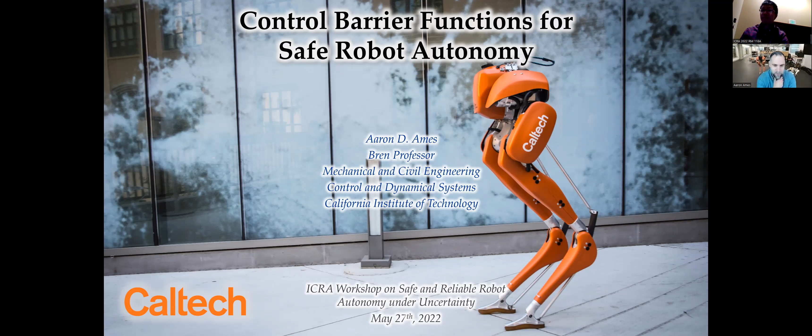I'm going to talk about safe autonomy. Before starting, I want to just note that my students played a huge role in all this work. This is my current lab, and there were 9 of them at ICRA. So hopefully you ran into some of them over the course of the conference.

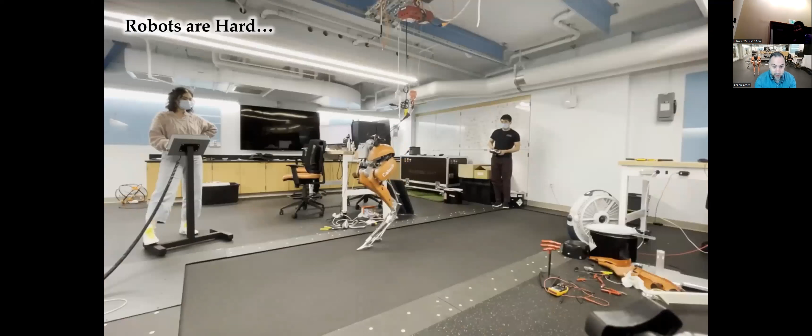All right, so to kick things off, as everyone in the audience knows, robots are really hard. They fail often and spectacularly, which makes them a lot of fun to work with. But the question becomes, what do we do with this fact that they're hard? How do we ensure safety on robotic systems in this context? So what we'd like to have is this working example of robots all the time. Robots are really awesome when they finally work and things come together.

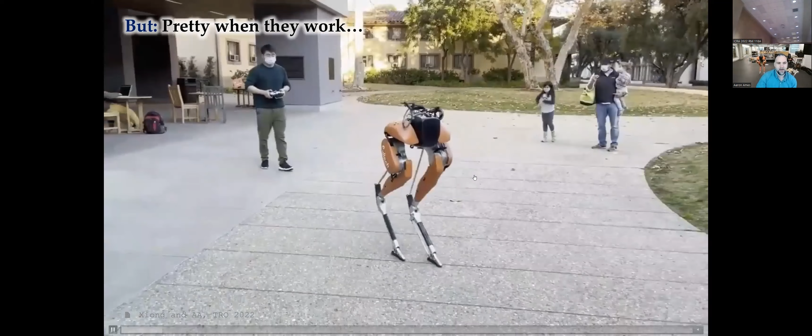This is just one of my students, Xiaobin, walking Cassie around the Caltech campus. And I like this video a lot for multiple reasons. One is you get to see Cassie walking. You've probably seen Cassie and Digit multiple times throughout. But the other reason I love this video is this, where the kid comes from the background and runs up on the robot and tries to catch the robot.

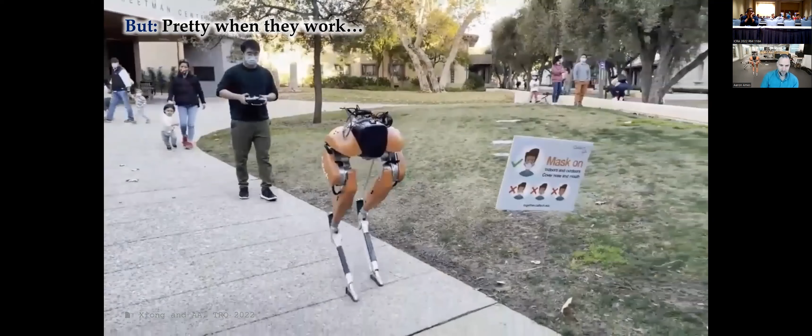And I think this is another aspect of what we do with robotic systems that both makes it exciting, because there's this broad appeal of robotic systems, but also makes safety really a critical component. People, humans like to interact with robots, and we need to make this safe.

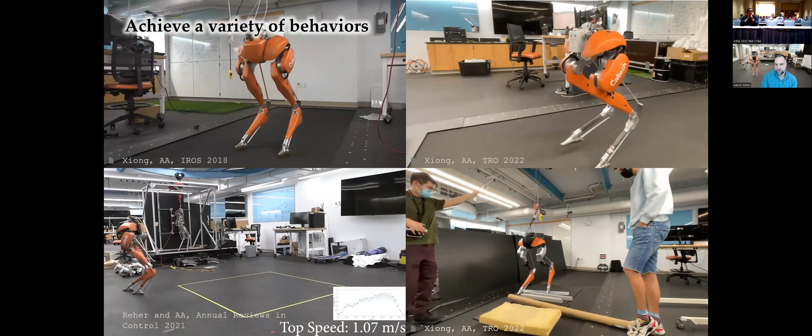I just want to also note some other highlights. This is just a highlight reel of different behaviors we've gotten in the lab. And it shows that robots are really capable at this point. What we've been able to do in the last 10 years, 15 years on advanced robotic systems is quite remarkable. To do these kind of things in a lab on a robot, walking over really complicated terrain, jumping, walking quickly. So robots have great capability, not just in the lab, but outside of the lab.

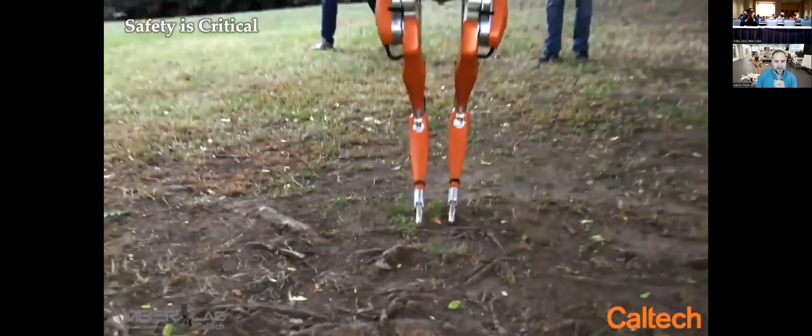So this is just a shot of, again, Cassie walking with our algorithms around Caltech campus on unknown terrain that has a non-trivial slope on it. And so this shows, again, the capability of robotic systems. And as with everything, though, you see these wonderful videos of robots working right. As you know, with your ICRA videos, you get these great shots that you put with the ICRA paper. But often the world's a bit more complex, and things don't always work exactly as you would expect.

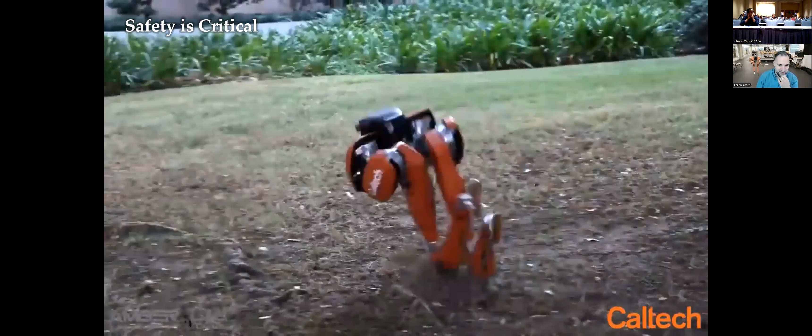So this is another video. This is actually a much earlier video, some older controllers on Cassie. And in this case, the robot spectacularly falls on this root system it wasn't expecting. So the question in terms of safe autonomy becomes, and this is really the thing, our focus changes from getting robots to do things to making sure they're safe while they're doing those things. And that's where the conversation really changes from stability to safety.

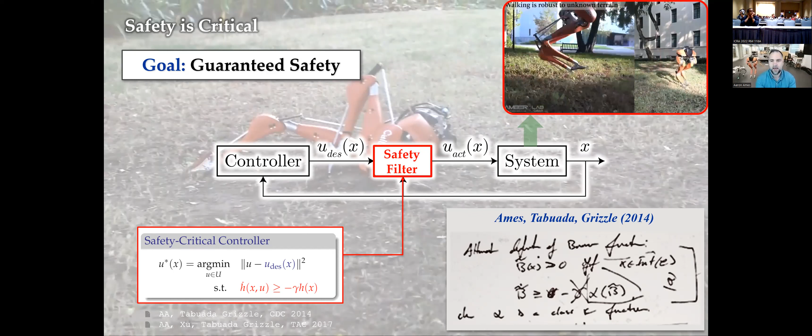And this is what I want to highlight in this talk: not the controller synthesis, specifically stability or any of those concepts, but rather how we view safety. And what we'd like to have is this video on the top right, where now it's walking over that same root system, but it does so without falling, in a safe manner.

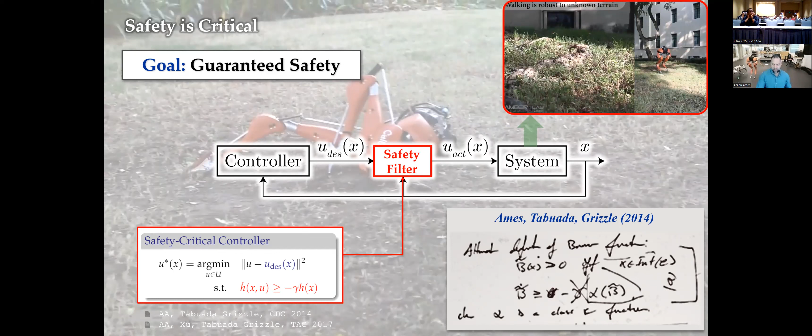And so to talk about safety, I'm going to talk specifically about this mathematical construction called control barrier functions. It's a relatively recent invention from about 2014 that has changed my viewpoint of safety in a formal context. So let me start with a little bit of the mathematical background. All right, so what do we mean by safety? I'm going to be really brief on the mathematical front, but what I mean by safety is the following.

And this question has really long origins. The earliest results date back to 1942, and arguably a little bit sooner than this, with Nagumo's theorem. Nagumo's theorem gave us necessary and sufficient conditions for a system to be safe. But these conditions almost always relied on checking conditions on the boundary. But what we're really interested in is, how do we quantify safety looking everywhere in the set? Because this changes the conversation.

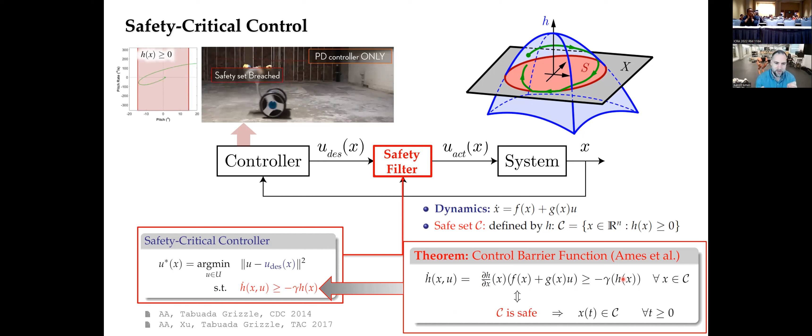And so the recent invention from 2014, again with me and Paulo Tabuada and Jessy Grizzle, was we can come up with conditions that are also necessary and sufficient, but now they extend to the entire set. That is, everywhere in the set, you can check the derivative of this h function along solutions. And if it's lower bounded by minus some class K function, view this as a constant if you want for simplicity, times h, then you're guaranteed to be forward invariant in that set. And what this does is allow us to synthesize controllers that guarantee safety, specifically optimization-based QP controllers.

So what do I mean by this? How does this work? Well, we take our nominal control value, u desired, that's what was running here. And so in this case, safety is the Segway staying upright. And what's happening is my student, Tom, is kicking the Segway, which pushes it outside of its safe operating region, causes it to fall down.

So if we instead take that controller that's running here and put it in as u desired, and then enforce a safety constraint on top of that via control barrier function, when we kick it, it no longer leaves a safe region, but rather stays within it for all time. And so this, again, gives us safety via this idea of a safety filter, which is this quadratic program.

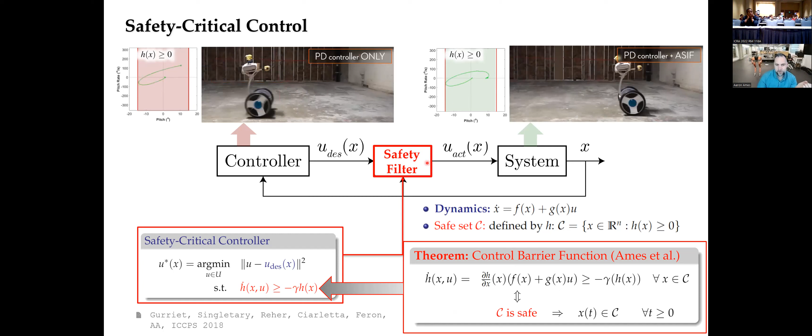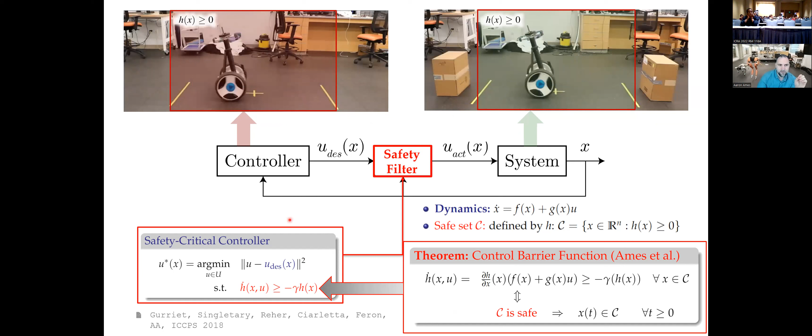We can do this with lots of different notions of safety. For example, if safety isn't the Segway staying upright, but the Segway staying in some region in space on the ground. So imagine people are working here. This is a factory environment. Then in this case, without the safety filter, you can make the robot go really unsafe. But with the safety filter, modulating it based on the control barrier function, you can keep the Segway within this safe operating region. So that's the basic mathematical control framework.

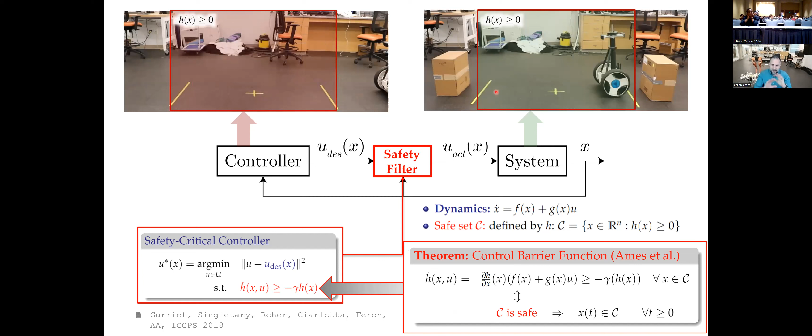And this has had a lot of applications, and I'm going to just describe some of them briefly. One example is drone flight. So now our safe set is defined as not hitting obstacles in space. So there's onboard camera, onboard sensing, onboard computation here. And when my student moves the obstacle, which is defining the safe region, now it's safe for the drone to move forward.

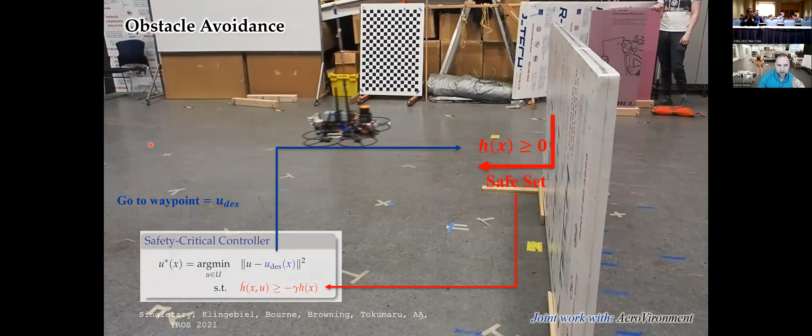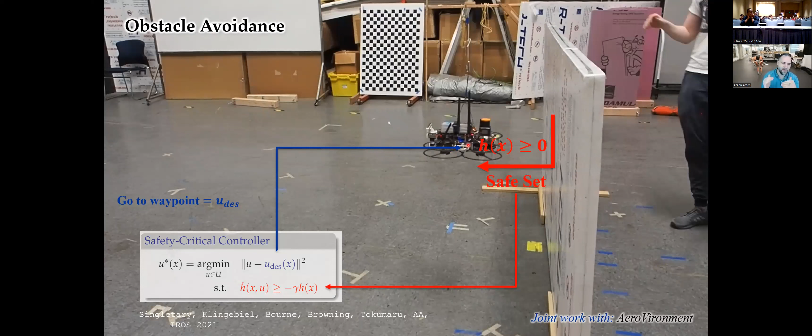So again, the drone is on a path that would drive it right through the obstacle, but the barrier function prevents that, overrides that command because it would result in unsafe behavior. And when that obstacle is removed, it can continue on with its nominal trajectory unabated.

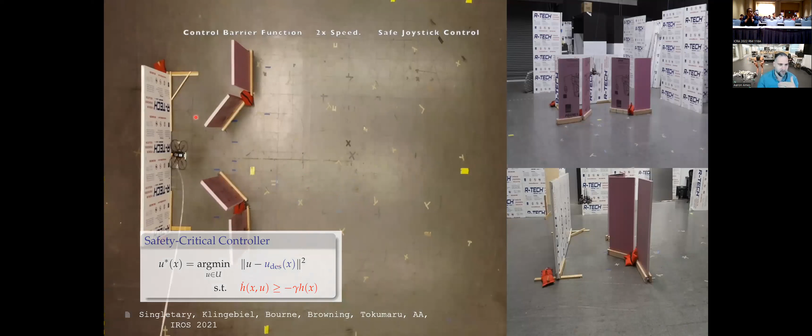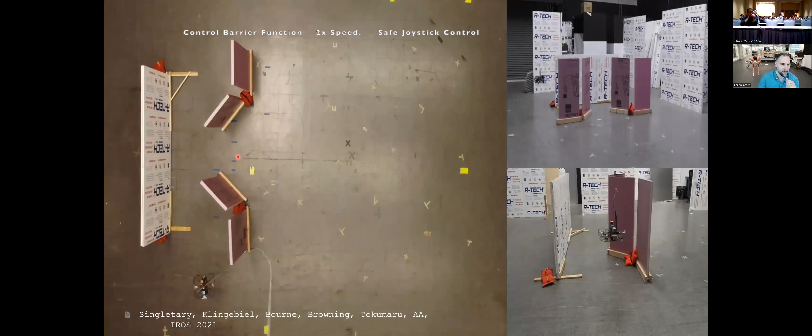So we've also done this with more complicated obstacles. The great thing is we don't need to have convex obstacles, convex space. You can just define this over really complicated geometries in really simple form through these functions. And again, here a pilot is trying to drive the drone against these walls, but the barrier function is preventing it from hitting the walls in this context.

One more example that I think is really compelling. This was actually presented at ICRA a couple of days ago, which is safe drone flight via geofencing.

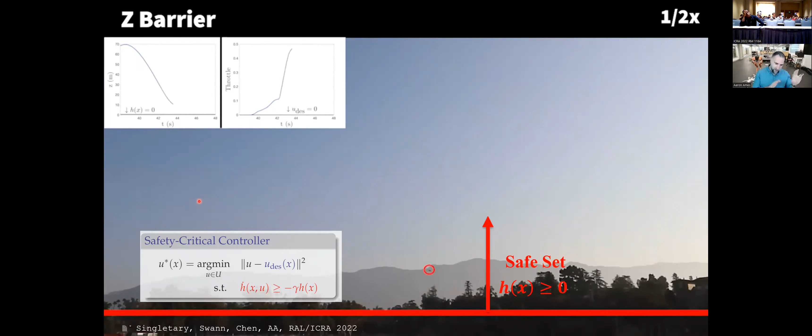So this is the same idea as before, but now we've come out of the lab and into a natural environment where now the safety constraint is don't leave regions in space defined by the geofence. And you'll see here, this is the red line showing where that geofence is. And the pilot in this case, just like before, is trying to drive the drone outside of the safe region.

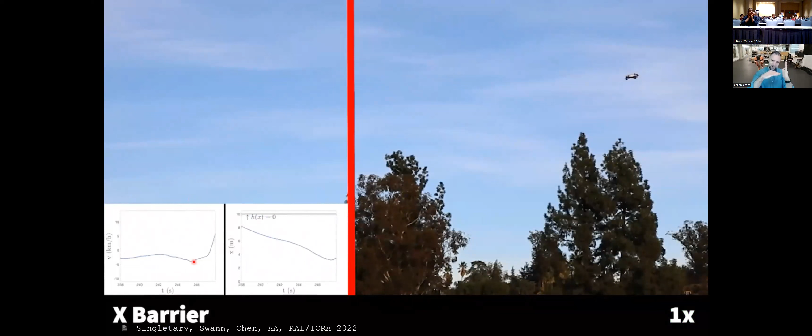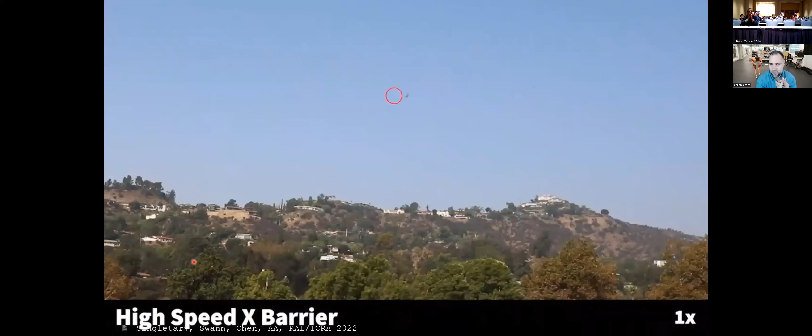And you'll see the value of the barrier function here. So it always remains positive. And the value of the velocity as it hits that wall, the drone slows down in the process. So again, we're able to do this with onboard computation, onboard sensing, in this case using GPS, and at really fast speeds.

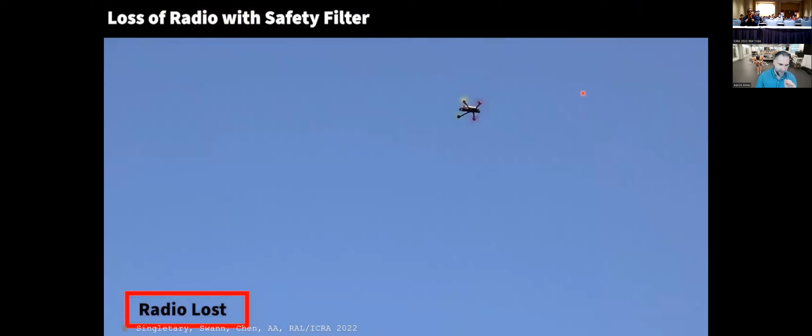It's hard to even show this now at full speed because the drone here is actually traveling at 100 kilometers per hour. So it's going really, really quickly. And we're able to still prevent it from leaving these geofence regions. So that's sort of the basic mathematical framework for safety that I want to underlie the talk on autonomy. So where does this fit in autonomy?

Well, let me set the stage a little bit with more complicated robots. So these safety filters are fantastic and work really well, if I can say that about my own work, on lots of different applications. And again, I'm going to show some more examples later. But things get really interesting when you get to more complex robotic systems. So you can still apply barrier functions in this case.

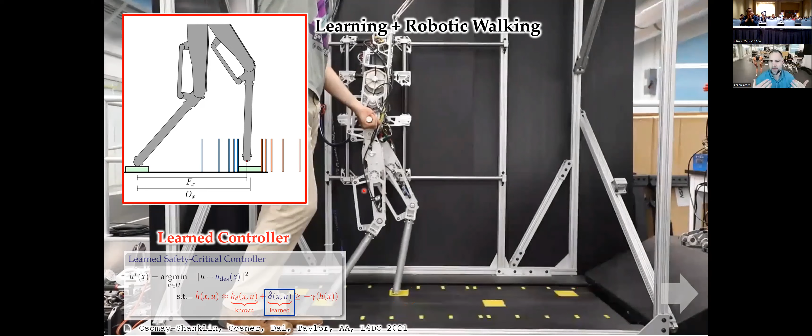So in this case, the application I'm going to show you is what's called stepping stones. So here, the barrier function is that the feet of the robot must land within these yellow pads at every point in time. But because this is a very complex robotic system, if you just enforce this as is, there's errors in the system that accumulate, modeling errors, et cetera, that cause you to miss these safety critical features. So even though you're enforcing the barrier, you still get unsafety because it's a very complicated system.

So one solution to this, which is what happens here, is we're actually going to learn the residual dynamics in the barrier function. And by learning those dynamics, we can force the system to be safe. So this is where learning and control can start to play a role together. So after just 2 iterations, 2 episodes of learning, we're now landing on these stepping stones every time, which is nice. But I don't think this is the correct answer in general.

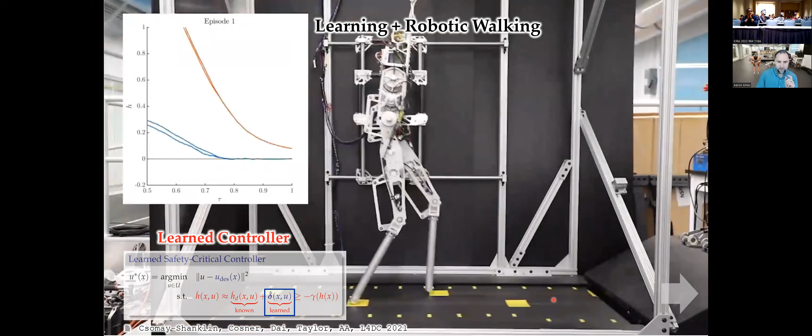So you don't want to just deal with what I would call a flat robotic system, where the dynamics are viewed in this flat monolithic way, and then you just learn residual dynamics. Again, this is a powerful method, but something happens if you start viewing this from an autonomy perspective. If you take an autonomy viewpoint on this safety critical control idea and start to put a hierarchy, an autonomy stack, into the mix, things get a lot better even without the need for learning.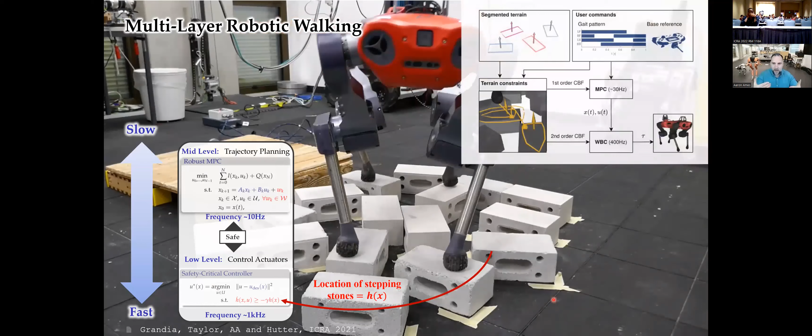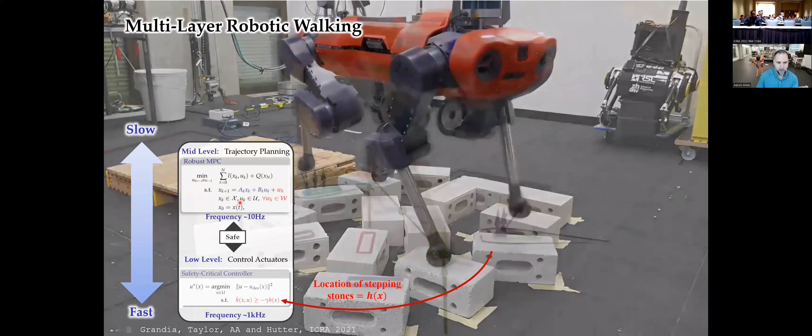So what I mean by this is what we have now is a small autonomy stack where we have a mid-level trajectory planning layer, which is running a model predictive control problem. And we're passing that to a low-level controller that enforces barrier functions. And we're again doing stepping stones. This is joint work with Hutter at ETH. I heard he gave a great plenary with this robot, so you've seen it here at ICRA as well.

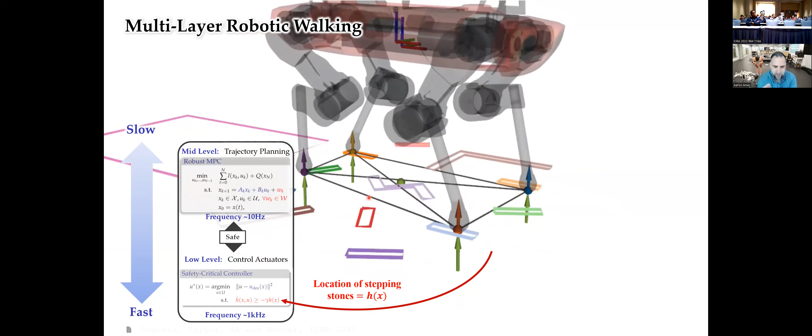But we're able to do this stepping stone behavior by merging these two together. Even though the robot's very complex, with really complicated dynamics, we don't need learning in this case because we're using this layered approach, where the MPC enforces safety constraints, passes it to the low-level controller, which again enforces safety constraints, and these communicate to one another through this autonomy stack. So I'm showing how when you layer things, there's a power to this layering. And this leads to the notion, in my mind, of the power of autonomy.

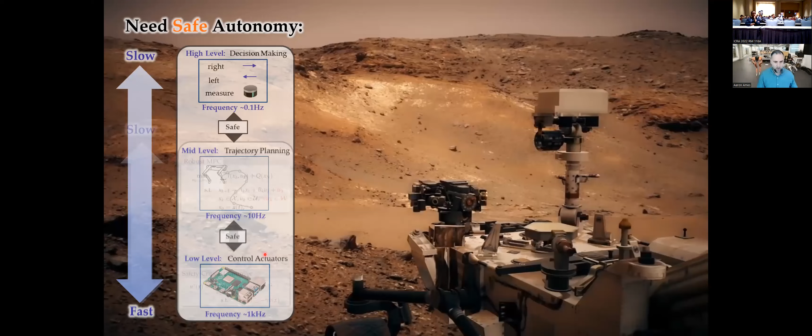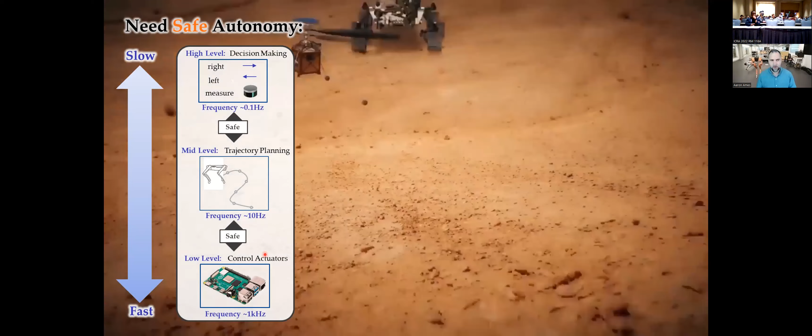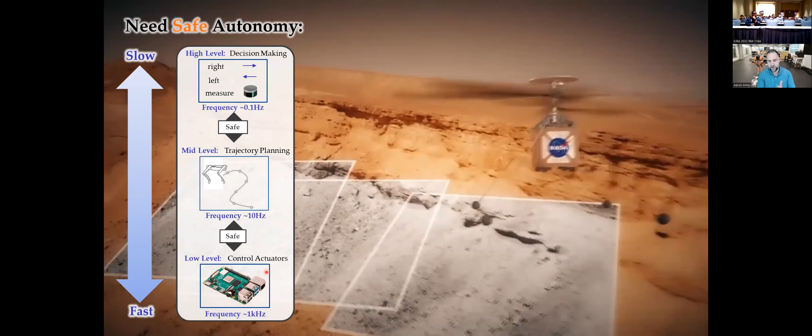So the question now becomes, you want safe autonomy. What does safe autonomy mean? In my mind, it means first acknowledging the role of the autonomy stack in general, the role of the different controllers and algorithms as they play a role in this overall system architecture. And the reason I'm showing this video, it's an older video now, but I really like this concept, and this motivated a lot of the work that we've done on autonomy, is you have a rover on Mars, you have a helicopter, they have to coordinate with one another, pass information back and forth.

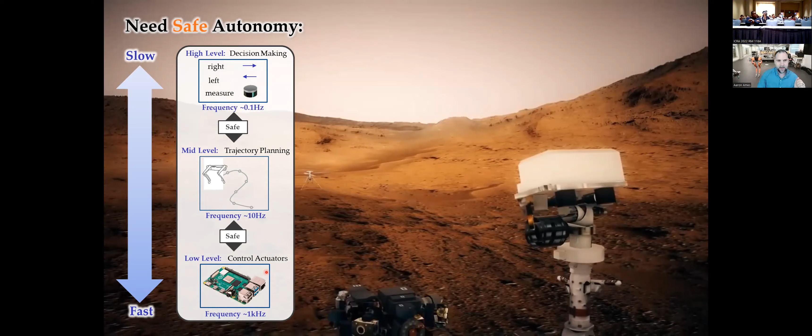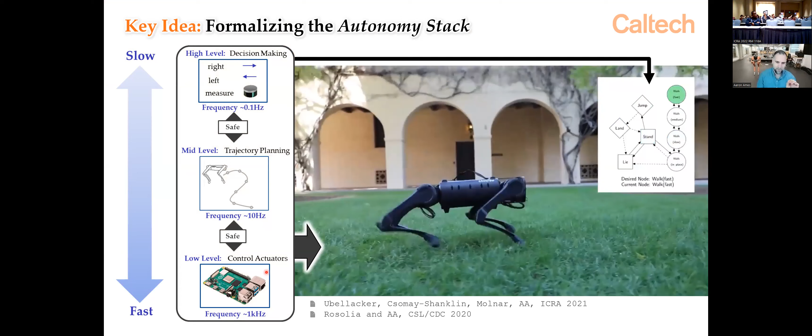And how do you understand these really complicated problems where safety is super critical? You have to plan ahead to make sure that they're safe. And again, what I'm saying in showing that graphic is, to me, the key idea is formalizing this autonomy stack. I mean, roboticists use this all the time, but we want to formalize it from a formal perspective and leverage this architecture to make robots do really impressive things.

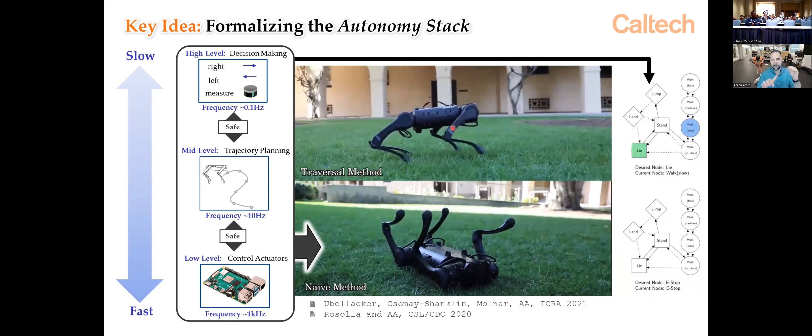So this is just showing a little video of a robot walking and then jumping. And the point is, if you do this ad hoc, like on the bottom, you get failures. But if you start to formally synthesize things through this broader autonomy stack using things like motion primitives, all of a sudden you can get much better behavior. And that's really the motivation for this.

So let me tie this back now to the safety critical control and show, in my mind, a really powerful example of how leveraging the autonomy stack plays such a powerful role in safe autonomy. And so let's take this example of a drone. And you want to make a drone avoid obstacles in space. This is a very classic problem. And I showed you this example earlier with AV where we did this.

Now, the point here is we don't want to have to go in and modify all of the control algorithms and all the different loops happening on the drone, but rather we want to append on a module that will make sure we're safe, working with those existing controllers and not modifying them at all. And the way we do that is we can take a low dimensional representation of the drone. This is what's done, for example, classically in robotics with artificial potential fields and things like that. In this case, we do a single integrator representation of the drone.

We synthesize a barrier function for that single integrator representation, which I'm going to call now the trajectory planning layer. We send that safe reference velocity to the drone, and that's tracked with its onboard controllers. And the important point is this is something that's done all the time in robotics, but what we have here is a certificate of safety using that layered architecture. What I mean is we can formally guarantee safety on the drone with its existing controllers, assuming there's reasonable tracking. So this was also presented at ICRA this time.

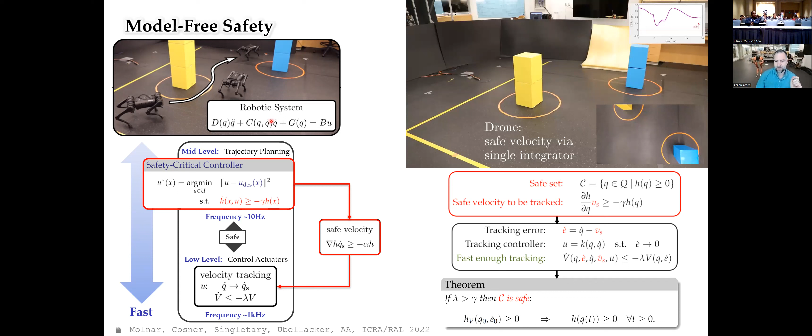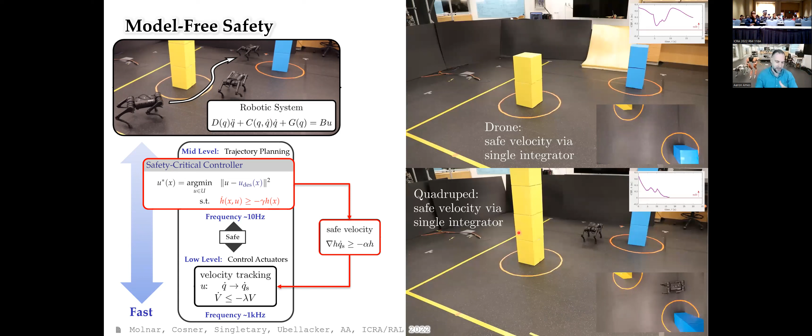And the great thing is once you do this, once you understand and leverage this autonomy stack, even acknowledging the full complicated dynamics of the system, you can do the same thing on a quadruped that you did on the drone. So this is the exact same safety critical controller now running on 2 different platforms with totally different dynamics and morphology, but still in both cases, we get formal guarantees of safety by, again, leveraging this autonomy stack. So this idea is powerful. It goes beyond just those.

We actually have a recent submitted paper, it's still under review, where we can do this on a manipulator too. Same idea. We leverage safety critical control at this mid layer to modulate reference trajectory signals and then pass that to a low level controller. In this case, we have no knowledge of the controller. It's the existing onboard controllers for the arm, and we're able to achieve safe behavior. This is a collaboration with Miso Robotics. So again, I'm just showing these examples of how when we understand the architecture of the autonomy stack, we can get safety much easier than we would if we try to design these controllers from scratch.

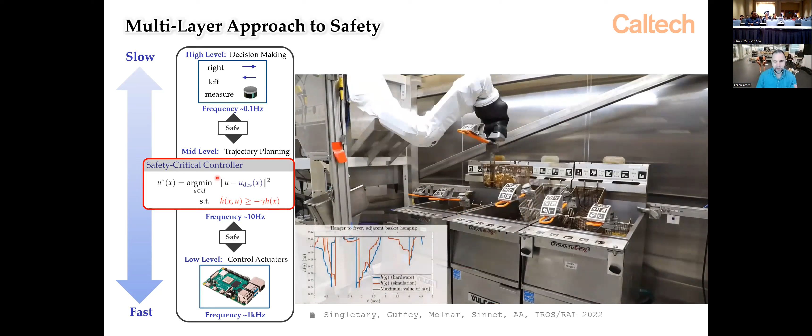So this also points to a really powerful way to integrate learning and computer vision into this broader architecture. So in this case, we modify this mid-level barrier function in the autonomy stack, like I mentioned before, to account for the fact that now we have onboard sensing. So what's happening here is we have a quadruped. It has its own onboard walking controllers, also developed by my lab. And then we have a camera system with 3 cameras.

And what we're doing is self-supervised learning. This was also presented at ICRA. So this is like a highlight reel of ICRA papers. And we have self-supervised learning that determines the depth of objects in space with those onboard cameras. That depth is then used to calculate the barrier function at the mid-level trajectory planning layer. So we're modulating the forward velocity of the quadruped via a barrier function that accounts for the uncertainty in the sensing via this additive term.

And then we pass that down to the low-level controllers, which are our nominal walking controllers. And by doing this, we're able to guarantee safety on the system, even in natural and complicated environments, and even where there's, for example, a human that's stepping in front of it. So this is the barrier function right here, reacting to the human as it walks and then going forward.

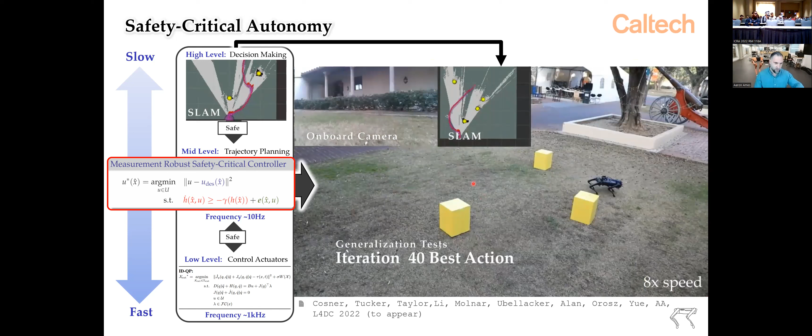So again, the autonomy stack lets you do things like fold in computer vision. In this case, we also folded in SLAM. So this is going to appear in L4DC this next month, where we now have an autonomy stack where we're doing simultaneous localization and mapping. We pass this to the barrier function, which then makes sure we don't hit obstacles in space while using our own onboard dynamic walking controllers in the process.

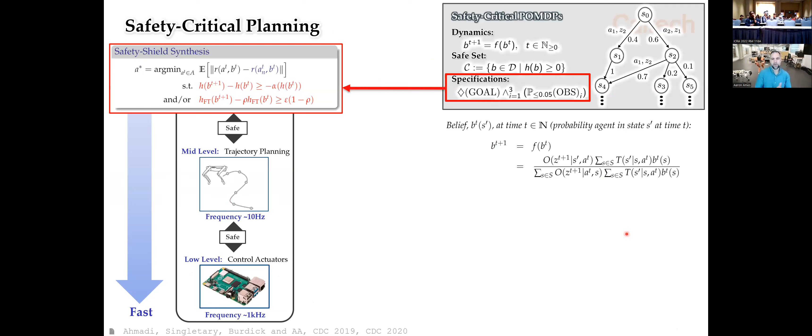So finally, I want to note that there's ways of also taking this safety critical consideration up and down the stack. So initially you saw it down the stack at the low level control level. Then I presented sort of a mid-layer barrier function. You can also do barrier functions at the top layer. And I'll just be brief about this.

But for example, if at the top layer you're doing planning with things like POMDPs, you can actually synthesize discrete time barrier functions representing the discrete time dynamical system, which represents the evolution of the POMDP. You can enforce these barrier functions through a very similar sort of thing that we had before, an optimization type problem, and then enforce that at the planning layer to do collision avoidance up top.

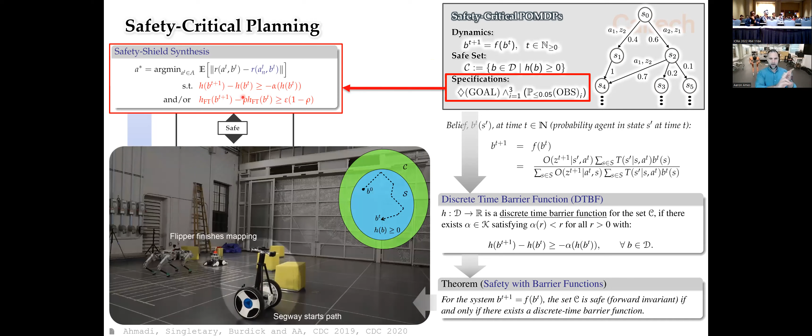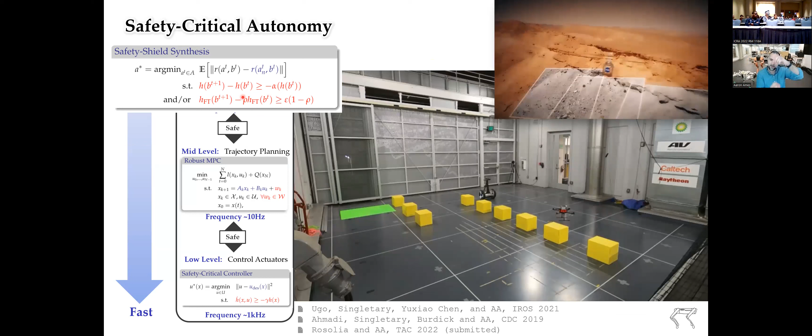So now we have barrier functions at the planning layer and sort of safety constraints at the mid layer, maybe via MPC, maybe via a barrier function at that mid layer planning layer. And then you can also do things at the lowest layer, safety critical control, barrier functions there too. And then you can pass these signals up and down the chain. And this starts to now speak to how we can guarantee safety up and down this autonomy stack.

And here I return to this example of a drone and a rover coordinated together sort of fictitiously on Mars. But this is kind of where we want to be, is deploying these things in these very safety critical contexts up and down this broader autonomy stack.

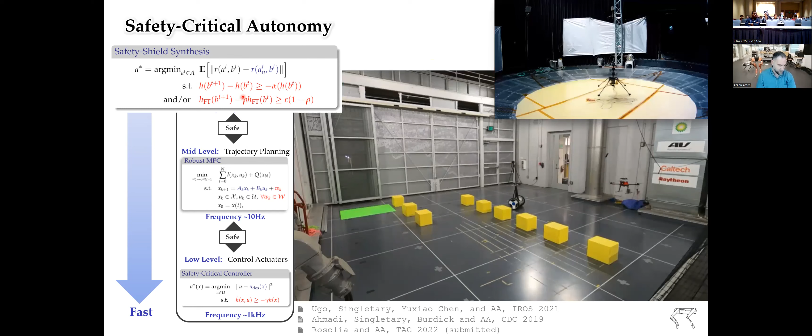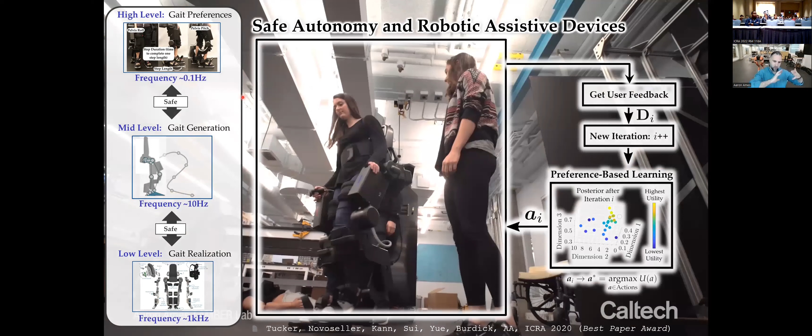So finally, in the last just couple minutes of the talk, I want to note that all of the lessons that we learn on autonomy for robotic systems have application in the robotic assistive device space. So in particular, I'm showing here the Wandercraft exoskeleton, which was also at ICRA. Hopefully you got a chance to see it, maybe ride in it.

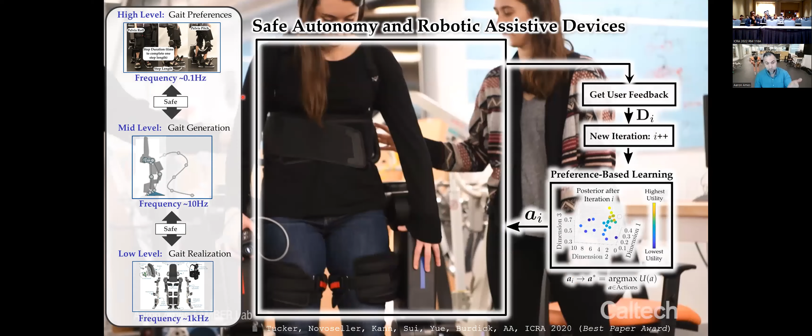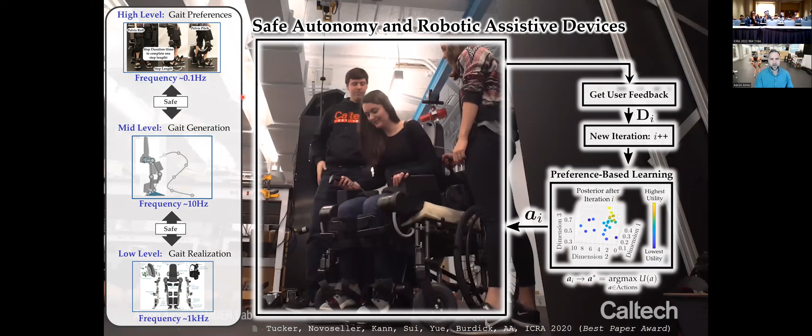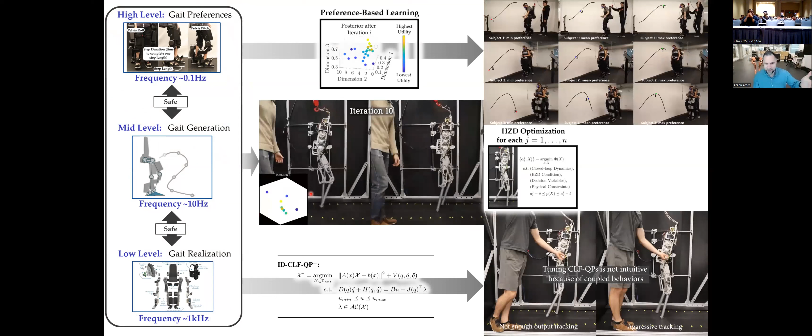And what we can do is take the lessons we learned on autonomy, and specifically this multi-layer architecture of the autonomy stack, and we can apply methods up and down the stack. In this case, what we're doing is applying preference-based learning to bring the human into the loop, where we can then, after that, apply safety critical control. But we can do preference-based learning on the gait selection level, we can do it on the gait generation level, and we can do it all the way down on the controller tuning level.

So the point is, the autonomy stack can be leveraged in these much more, I don't want to say complicated, but much different applications where now humans are in the loop, but acknowledging this role of autonomy in the broader architecture can open up new avenues. And this ultimately will allow, we hope, these kind of understandings of autonomy in general to be deployed broadly speaking.

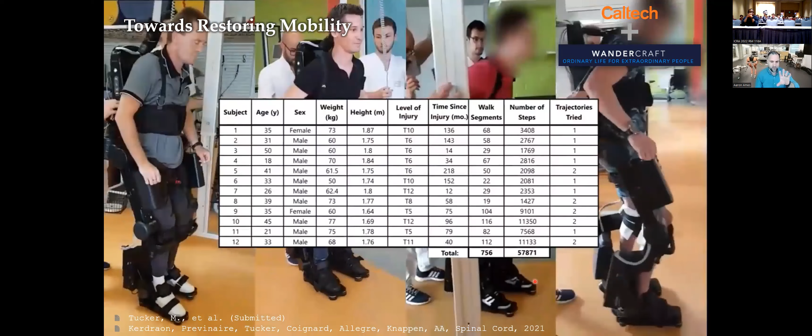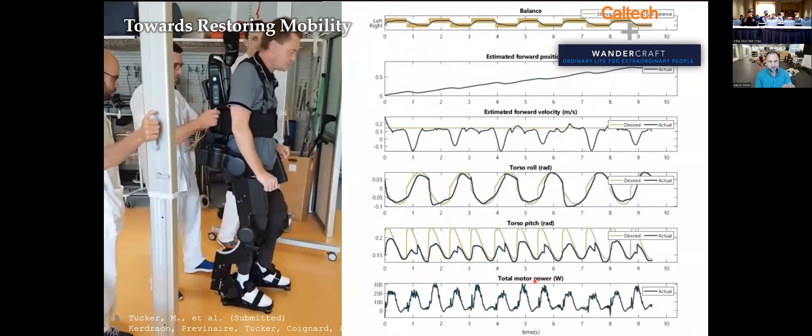So in this case, this is some earlier work that was in conjunction with Wandercraft, but this is their exoskeleton being deployed in a hospital setting. And the importance here, and why I'm showing this video and why I think this is so powerful, is that this is, I think, ultimately where we want to take autonomy, to real world environments.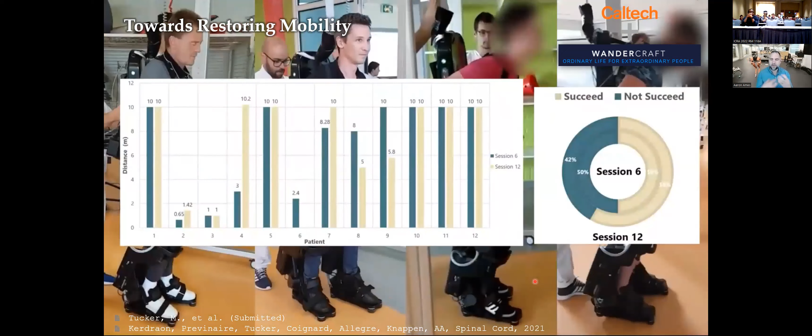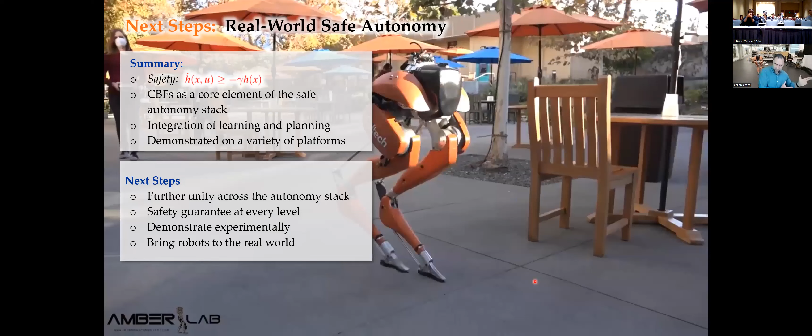So in this case, just to be clear, these are complete paraplegics that are walking dynamically with an exoskeleton that uses algorithms that were inspired by the robotics community, for which we've collaborated with Wandercraft, among others. But this is where we want to bring these kind of autonomy features, into real world environments that are complicated. And of course, on exoskeletons, but also on walking robots, right? So also on sort of fully autonomous systems where humans might be in the loop, might semi be in the loop, and might not be in the loop at all.

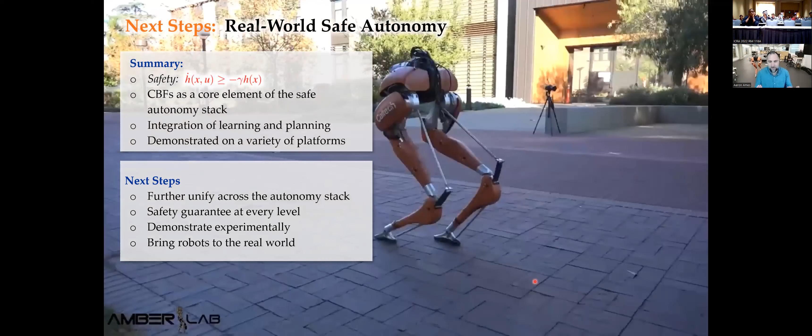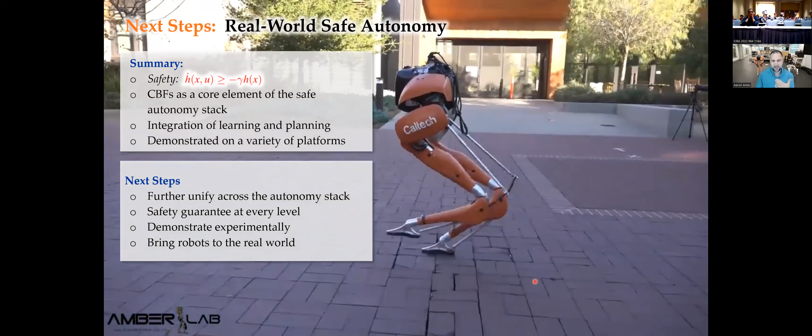And so that's really what's driving me forward in my lab, is to try to get these real world autonomy features widely deployed on real world systems and real world environments, for which I think the lessons of this talk are twofold. One is that formal control theory, nonlinear control theory, can play a significant role in guaranteeing safe autonomy at a formal level and also at a practical level.

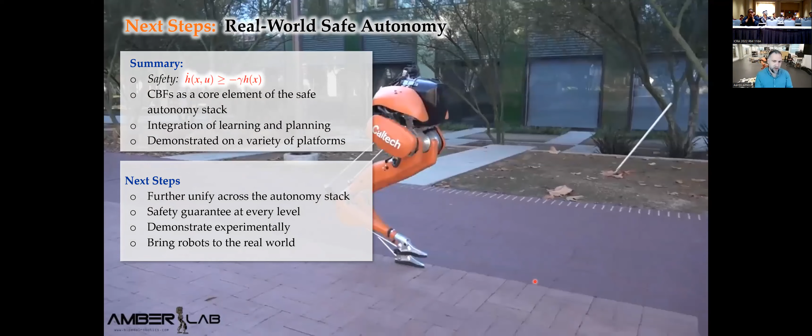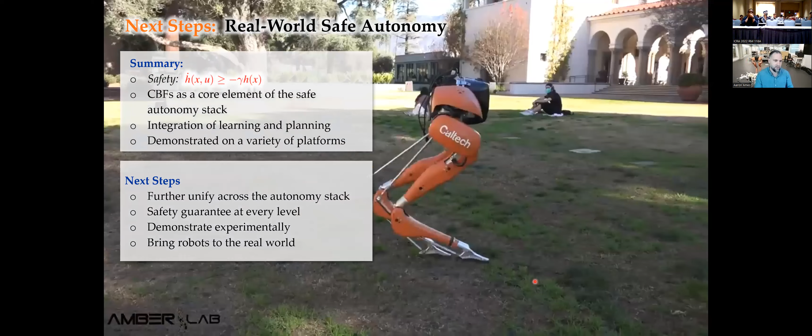The second point is that we have to acknowledge the architecture is present in these systems and make guarantees across these layers in the architecture to really make these formal safety guarantees. And with those things together, there's a lot of power in unifying all these together, with, of course, experimental results being the backbone to inform the theory and develop new theory that in turn results in better experiments.

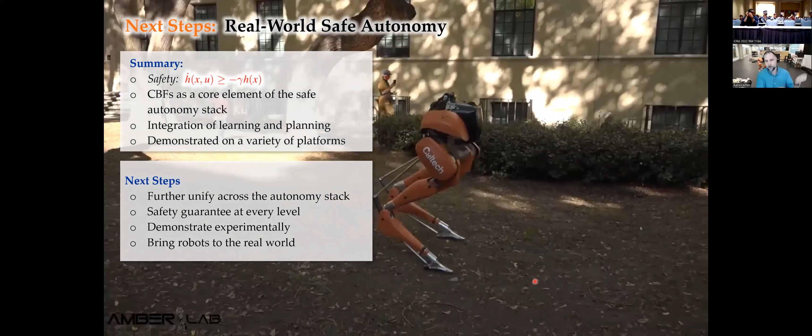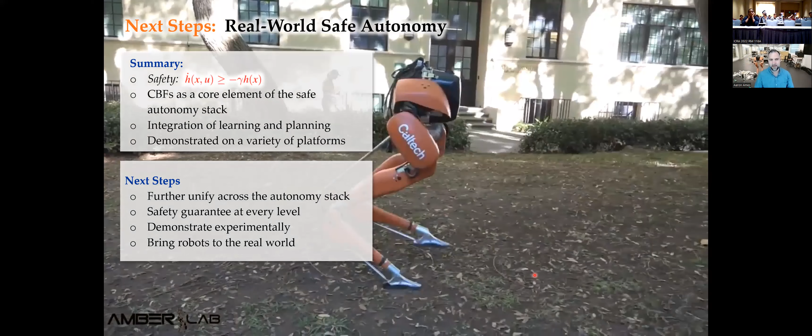So this is the biped walking over that root system where it fell earlier, and it just takes this root system on like it's nothing now, because we've made our algorithms better, informed by the failures we earlier had.